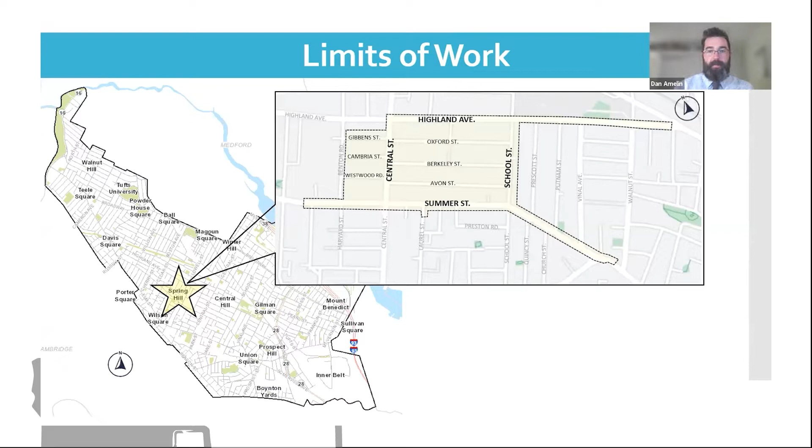So this is the Spring Hill Sewer Separation Phase 1 project. The limits are outlined here on your screen. We've got Highland Ave to the north, Summer Street to the south, School Street to the east, and let's call it Central Street to the west, although we do include Gibbons, Cambria, and Westwood within our project limits. There's a lot of different facets that go into this project and why we're doing this project.

As we get into spring, summer 2023, we transition out of upgrading all these utilities and focus on surface work. What that entails is split between green stormwater infrastructure and tree plantings, and a lot of mobility improvements. For green stormwater infrastructure, we're going to be building bioretention basins and stormwater tree trenches. In certain areas we are going to have some permeable materials, pavement, brick pavers.

And then for mobility improvements, we're going to be installing a lot of curb bump outs, replacing a lot of sidewalks, installing bike lanes, separated bike lanes. Central Street, as a matter of fact, is going to have separated cycle tracks heading north and south. We'll have speed bumps, speed humps. And I'm sure there's something else I'm missing. It's a very long list. But that's kind of the icing on the cake, right?

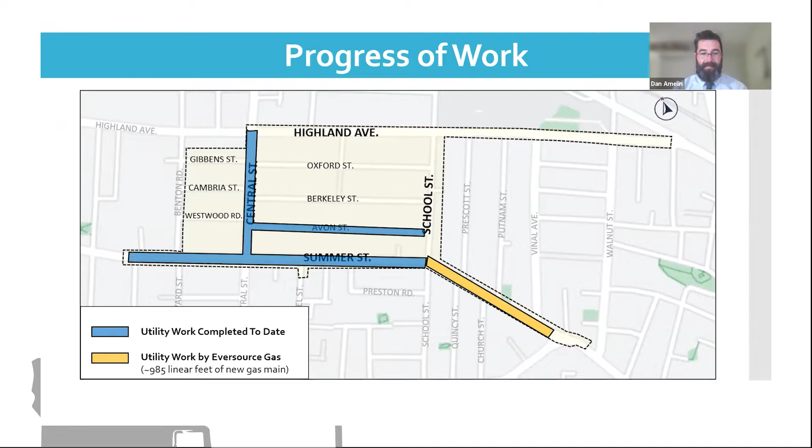So before we get into the nitty gritty of the work completed to date, first and foremost, let's talk about trees. Originally, this project had about 25 trees slated for removal. 15 have already been removed. We've got another 12 trees that will be coming down November 22nd and 23rd. So just in a couple weeks here.

For these trees, we did have a tree hearing back in February. These trees are slated for removal, the majority of which are ash trees, which unfortunately suffer from the emerald ash borer insect, which sadly kills the tree. So they are hazardous and thus slated for removal because of their poor health condition. The good news is we're planting 185 new trees. So there's a huge net positive here.

We have to wait a little bit until we get to that portion of the project, which could happen as early as late summer, early fall, about a year from now, before we start looking at tree plantings. But we just wanted to give you this quick update, knowing that the remainder of the trees that are slated to be removed will be removed here in the coming weeks. And that will most likely be it for the remainder of the project in terms of tree removals.

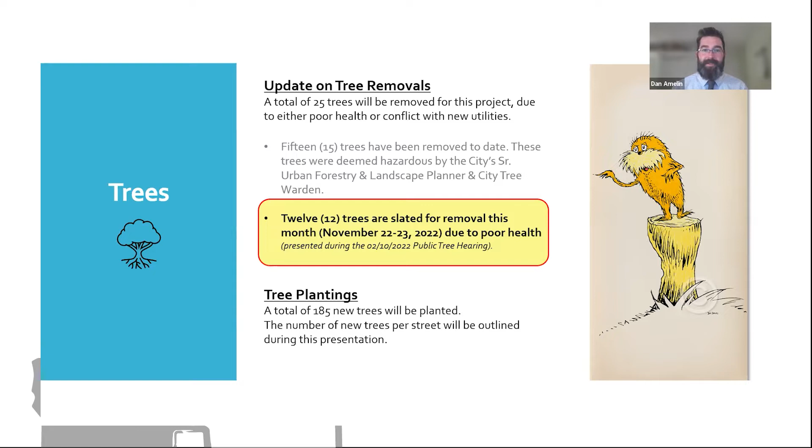So work completed to date. Let me dive into this in a second, but before I do, I will acknowledge there's a lot of words here. Plenty of our slides contain a lot of words, but we will have this presentation available on our city website, should people want to come back and refer to some of these quantities and more technical details. I don't want to bore you all to death reading each and every individual line, but we did think it was important to highlight exactly what's been done since we started this work.

So many of you have thankfully been patient with us in the construction process here, and it hasn't been in vain. So Summer Street, for example, we've got 2,500 feet of new drainage, almost 30 new manholes, a little more than a dozen catch basins.

Again, apologies, I've got a small child. I don't know if you can hear him screaming, but if you do, my apologies.

All new sewer pipe, and this next one's pretty interesting, and this applies to a lot of streets within this project. Despite some of these sewer mains and sewer systems being roughly 140 years old, engineers back in the late 1800s did a really good job of building these. Each sewer is typically made out of brick, all installed by hand. Obviously nowadays we typically use a Schedule 40 plastic sewer pipe.

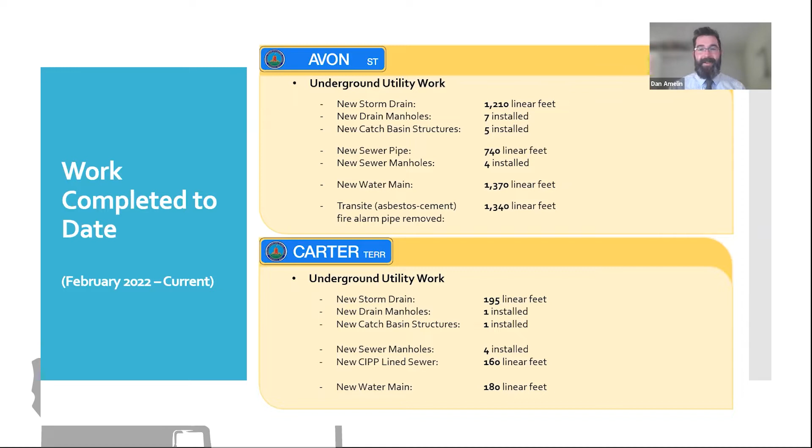But moving on, our look-ahead schedule. Jesse alluded to this during the introductions at the start of this presentation. We are going to be having another meeting next spring. The focus now is to look at what's happening between now and March, April of next year.

As Jesse mentioned, there is ample work that can be done during cold weather, during the winter. So all the streets you see in front of you, Highland Ave, Berkeley Street, Oxford Street, Cambria Street, and Westwood Road. At some point here in the next 2 months, our contractor will begin drainage work and sewer work. Those are the 2 predominant pieces of work that can be done during cold weather.

I do want to make a special note because each of these streets does have language that says they will be getting new water mains, new water services, and hydrants. We don't do that work over the winter. No. To address a question that may come up later on, many of you, especially on Summer Street, Central Street, Avon Street, have been connected to a temporary bypass main, which is essentially a temporary water conveyance while we upgrade or replace rather the water main that's in the street.

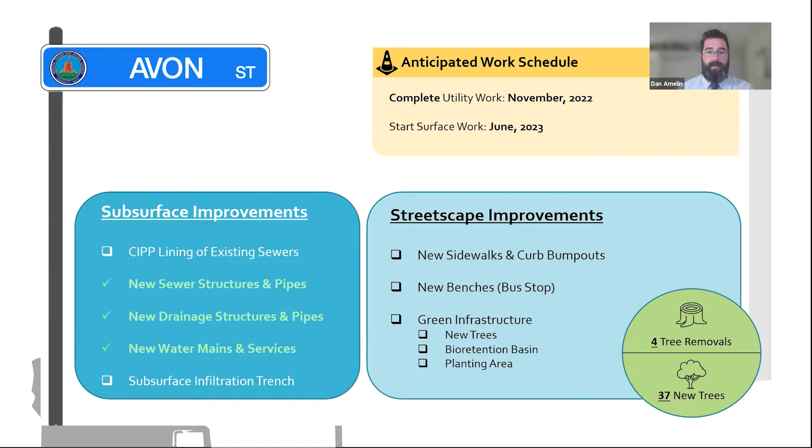So that being said, just to give you all a taste of what this type of work looks like, here's just some photos. We've got photos for a couple of streets, not every single one, but as you can tell here on Avon Street, on the left, we've got a sewer pipe installation. On the right, we've got a water main installation, excuse me. They look awfully similar, two completely different things.

And as we get through this, I think there's a slide for Central Street that I want to point out. Digging through city streets, as I mentioned earlier, you're going to come across a slew of other utilities. If you can tell in the photo on the right, kind of in the foreground, there's a pipe that crosses that trench. It's very small. But these are things that we try to anticipate and expect. We don't always know where they are. So depending on the work we're doing, the depth at which we're excavating, you may uncover other utilities that weren't known when this project got designed.

Just due to the nature of these streets, the age of these utilities, and everything that happened in the years between, that certainly predate the three of us working for the city. So it's certainly challenging work. We're certainly trying to do our best here and get this work complete with minimal disruptions and impacts to each and every one of you.

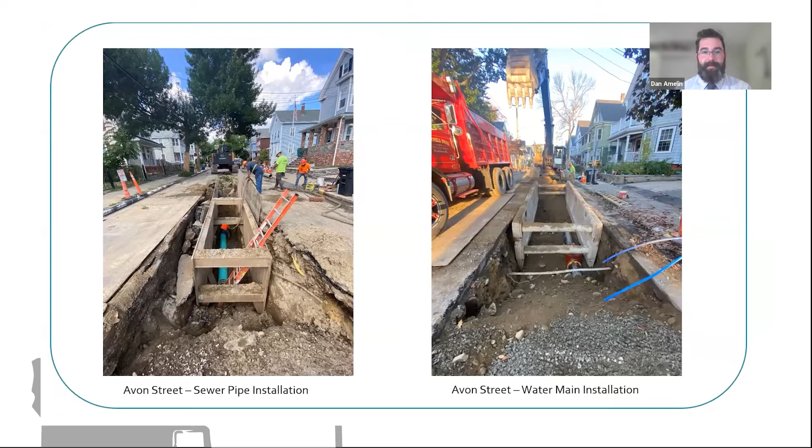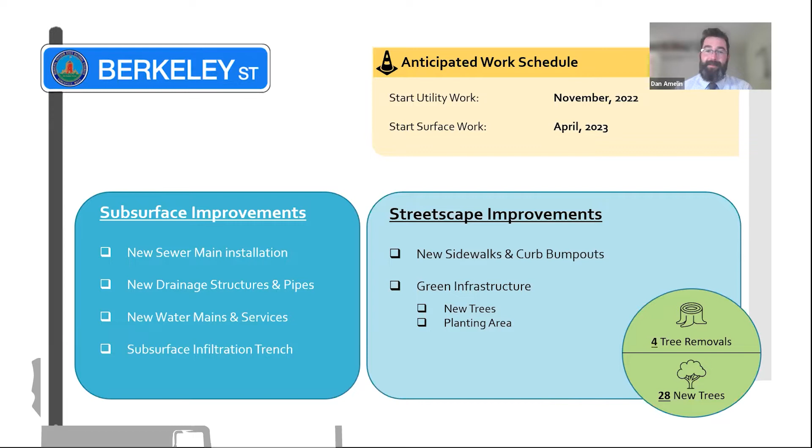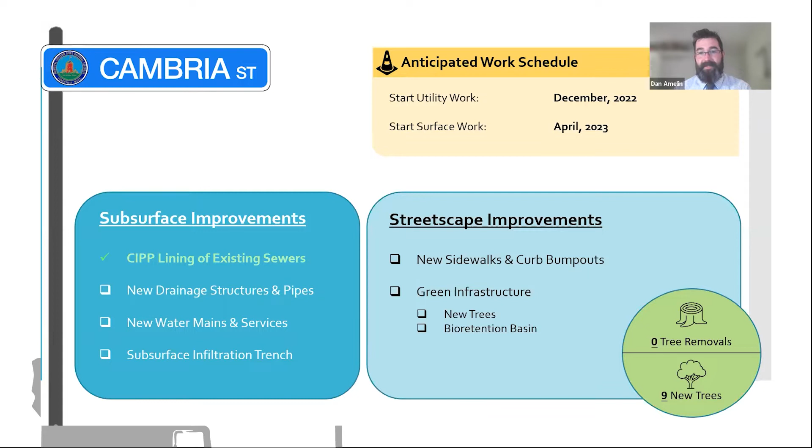Good news on Cambria Street, we've already lined that sewer. For the folks here from Cambria Street, we are expecting to start some work in December, so next month. For the folks on Carter Terrace, thank you, you've endured a lot here on your street. You've got new sewer structures, new drainage structures, new water main, new water services. We will have to come back and line the very short section of sewer on your street.

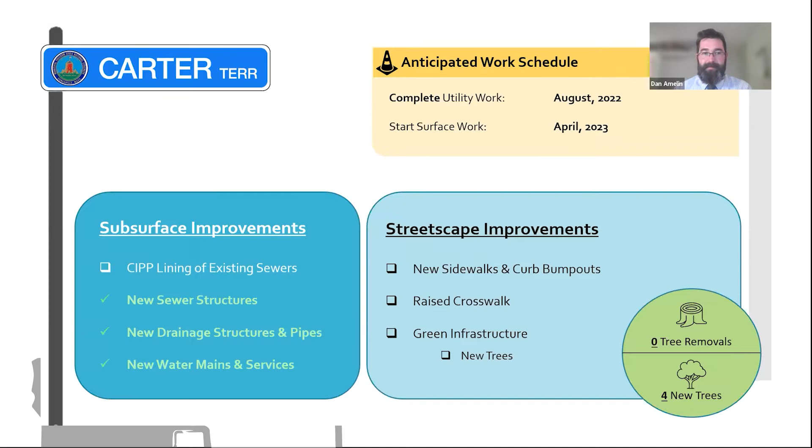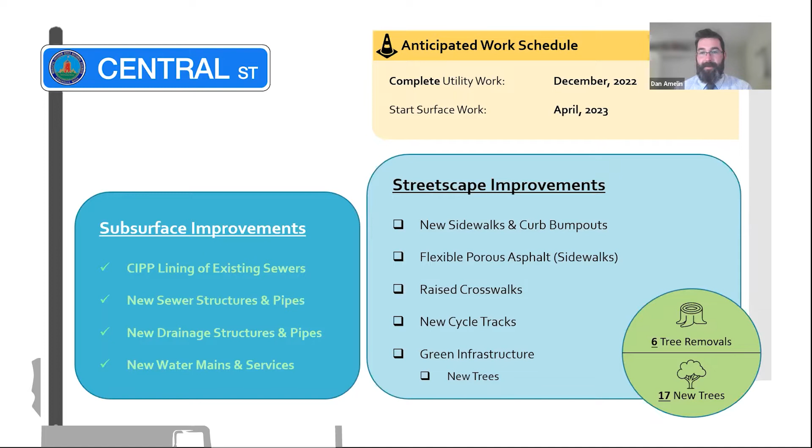Central Street, which has likely been a bear for a lot of folks using Central as their main thoroughfare to get home. We've been on Central Street here for the better part of 6+ months. We're wrapping up our work here by Thanksgiving, and we can finally reopen the roadway in two directions. Again, it's the completion of sewer, drainage, water, and sewer lining. So it's a lot of work.

And to show you what I mean, here's some photos from Central Street. On the left, we've got a drainage structure being installed down by the Summer Street intersection. Up by the Somerville Museum, you can see a new water main being installed. And one thing I want to point out, without getting too far ahead of myself, the bricks you see in the photo on the right, in front of the Somerville Museum, those are historic bricks. It's kind of cool. They've got the letter S stamped in them. We plan to save those and reuse those when we come back to construct the streetscape. They will be used as a buffer between the southbound cycle track and the roadway.

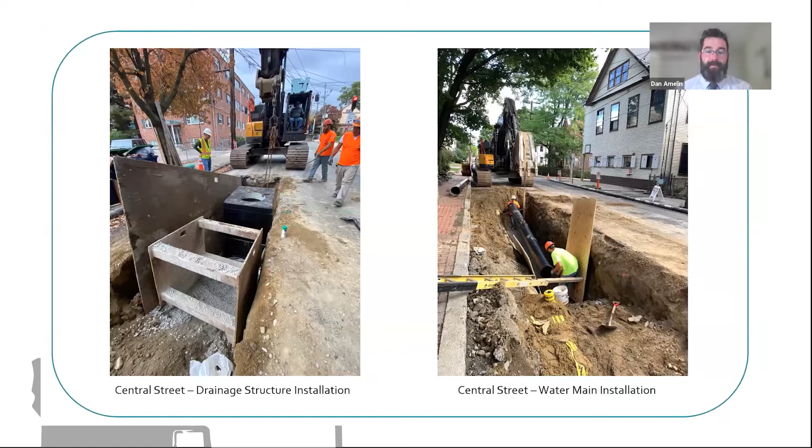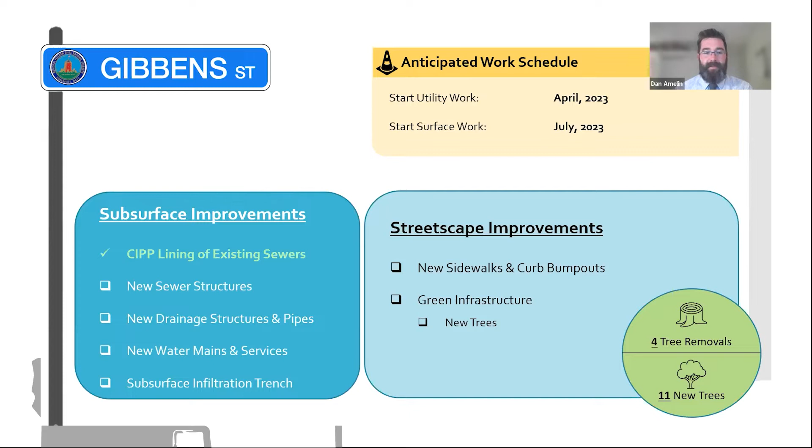And I'll stop talking now. I'll flip slowly through here. I may actually start talking here again in a second. Gibbens Street, this work probably won't happen until next spring. I know there's some ancillary work going on now, but the bulk of it will happen next year.

And Highland Ave, I spoke too soon when I said I'd stop talking. We've done a few test pits on Highland Ave. We are slated to be performing some pavement cores on Highland Ave in the next, really this week, next week. We understand that on Highland Ave, the condition of the roadway is subpar. It's a very rough road to drive on.

I'll take this time to mention, within this project, we currently don't have plans to perform any surface work. We do have a future project specifically for Highland Ave to perform all these surface improvements. Without knowing how far into the future that is, there may be opportunities here to do some restoration work as we get closer to the end of this project, given the condition of how the roadway turns out after we do our utility work.

So the one piece I do want to mention, which could happen in the next week or two, we do have utility work at the intersection of Central and Highland, on Highland between Central and School Street. We are going to have detours for this work, even though you think the roadway is pretty wide as it is. The location of the sewer is more or less in the center of the road. We will have to remove some parking, and we will have to detour westbound traffic.

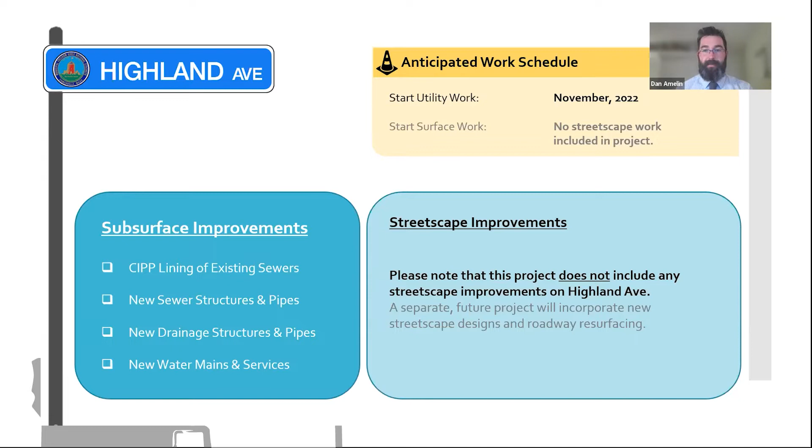So I'll walk you through what this detour is going to look like. The total duration of all this work from the intersection all the way to School Street is about 2.5 months. The first part at the intersection, it's not going to be the whole intersection at once. We more or less have to bisect the intersection into 2 halves. And the reason is we want to at least maintain one direction of traffic. It will be the eastbound lane.

Part of the decision to maintain eastbound traffic is due to the fact that Somerville Fire Department has a firehouse further west on Highland Ave, closer to Cedar Street. For the work in the intersection, the Highland Ave westbound lane coming from McGrath Highway will be detoured south onto School Street, west onto Summer Street, north onto Belmont Street, and then west again on Highland Ave to resume the route.

As I mentioned, given the location of these sewer and drain utilities, the depths at which we have to excavate and the machinery that our contractor has to use, we can only keep one lane of traffic open safely. So for the first portion of this intersection, we're going to take the northern half of Central at Highland. That's about 1.5 weeks. This could start middle to end of next week.

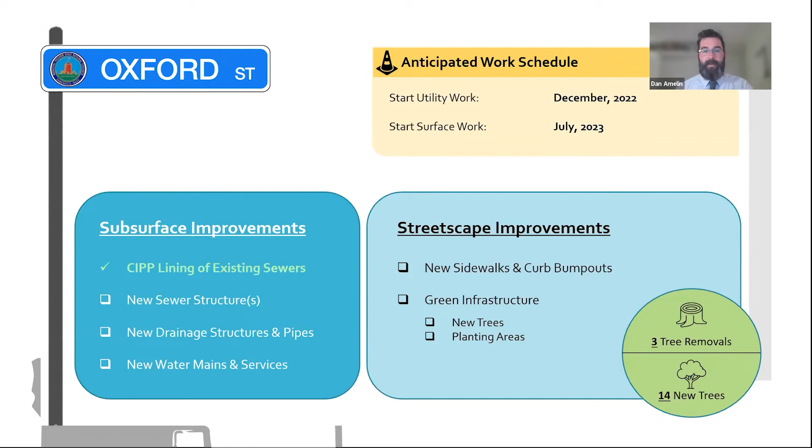So that's Highland Ave. That's upcoming here in the next week or so. We wanted to tell you here, like I said, we don't have an approval yet, but it does seem imminent. So back to streets. Oxford Street, we've lined sewers. We'll be starting next month with some more sewer work and drainage work. School Street likely won't start until next spring. There's just only so many areas we can work at once, given the amount of crews our contractor has available. So there'll be more emphasis on School Street when we meet again next April.

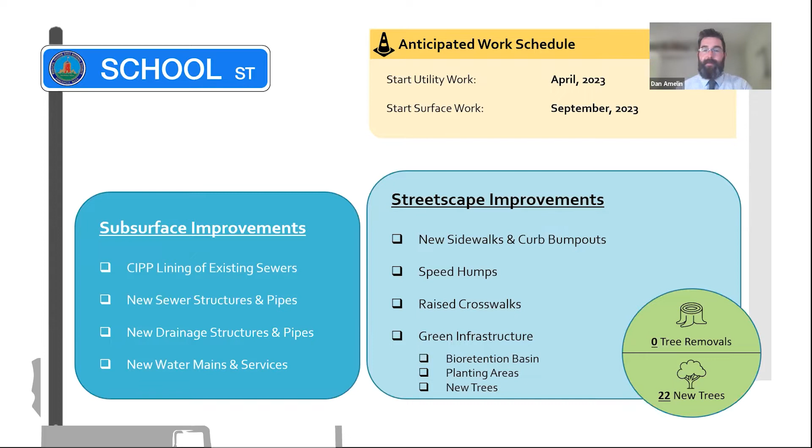And Summer Street, we have this broken up into two sections. As I mentioned earlier, Eversource Gas has been working on Summer Street between School and Bow Street. We can't work there until next year. For the section between Spring Street and School Street, however, this is more or less what we just completed. The street's been picked up. We've heard from a lot of you and have seen with our own eyes some of the, let's call it a mess, let's call it what it is. And we asked our contractor, before you start work on other streets, you need to clean up Summer Street.

Certainly there's residents who have had to stare at drainage structures in front of their house. There's residents who have had to deal with detour signs being placed on their fence or on their property. These are things we don't condone. We don't take them lightly. Jesse, Nick, and myself are not out there every day. We do have Stantec available on site, but they can't be everywhere at once either. So we encourage you, if there's certain things going on in the street, cleanliness issues, dust issues, which we've just heard about in the past week, which I'm happy to say are going to be addressed in the next day or two, we want to hear about it.

We acknowledge this work is cumbersome, it's impactful. We don't want your concerns to fall on deaf ears. We want to hear so that we can make adjustments. We can work with our contractor, we can work with our consultant Stantec to improve as much as we can for each and every one of you to have some sense of normalcy here while we do all this heavy utility work. And we'll talk more about how you can reach out to us going forward in this presentation.

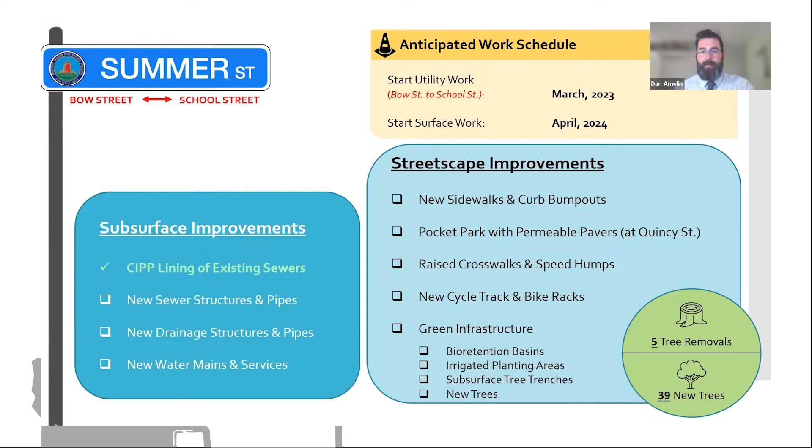What I alluded to earlier, Summer Street between Bow and School. We likely won't start work there until about March next year, so we can revisit that in the spring. And Westwood Road, last but not least. Again, the most recent schedule available to us shows this work predominantly starting next spring.

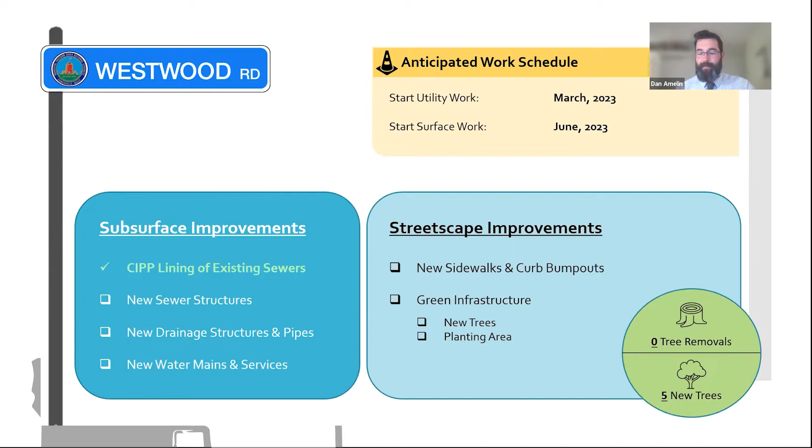So I hope I've answered some questions already, but for those who are curious, here are some of the questions that we've received to date from residents, from constituents, from councilors. We certainly tried to capture them as generally as we could. I don't think we could get every specific question listed on here for this evening, but we wanted to go over what we see from you all and provide some of the answers that we've provided to your neighbors.

Broken down into three categories. First is water quality. A lot of questions we received early back in the spring and early summer is, what is this pipe? What is this blue hose that's now connected to my house? As I mentioned, that's our temporary water bypass pipe that provides you clean drinking water. You are connected because they de-energize. They basically flush out the existing main so they can either remove sections, remove it in full, and replace it with brand new pipe.

The process to connect each individual building, home to water bypass, typically what our contractor will do is connect that plastic rigid blue hose to a faucet, a spigot, like a hose spigot, backfeed your house while they take the existing main out of service. More often than not, what that means is they bypass the water meter on your house. One question that we receive probably the most frequently, honestly, is how does this affect your water bill?

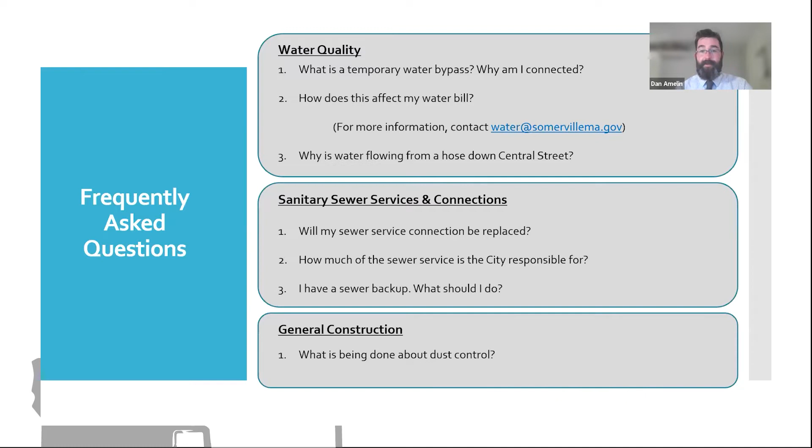But really, I would say the best way to get in touch is just call me. My phone is always on. I will get back to you. I pride myself in accountability to this project. So if anything comes up, I can be your first call. Also, if you call 311, they'll connect you with me if that's easier as well. But I'd write that number down.

Now is the part of our presentation where we're going to take questions, and something happened that I found a little unexpected. We have 31 questions in the chat tonight, Dan. So I think I'm just going to read one, and then we can discuss it. And then after that, we'll start actually unmuting folks if they want to speak to us. But we should address the 31 that came in first. So, Dan, you want to click the slide button?

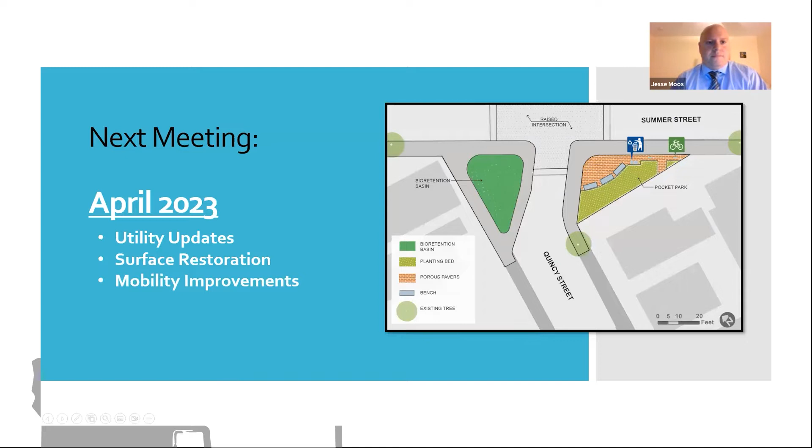All right. Question number 1. Construction activity is occurring on our street, but we are not getting notices about the insurance documentation review, and the company said they are not on our street yet. What happens if the current work damages our house?

They reached out by doing certified letters at first, then just kind of basic knocks on the door. It is possible that you didn't receive the letter, you were not home and they knocked on the door. We want to make sure that this is happening and they're documenting the current conditions, and then if anything was to happen during construction, we can review photos and then discuss if a claim should be made.

Let me just add to that, Jesse, real quick. Sure. For those of you who are joining us who are renting, Jesse mentioned we send out pre-construction inspection letters. Basically, a letter saying, would you like to have your home inspected prior to the start of this work on your street? Should something happen, we have a record of what it was before.

For the renters that are out there, these letters are addressed to the building owner. If you have concerns that your building has not been inspected, please contact the owner of your apartment, your building, and follow up with them to see if they've received a letter.

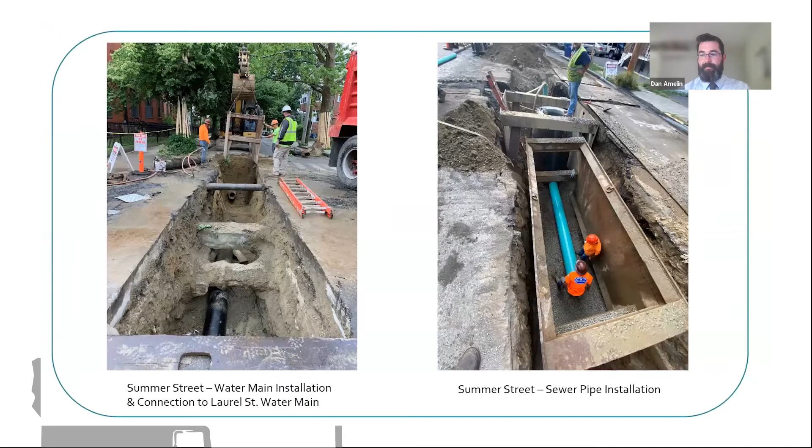No, not a problem. When you're talking about detours for traffic, does that mean all traffic, cars, bikes, people in wheelchairs and pedestrians? Or to ask a different way, are there any different plans for people who need wheelchair access or who are on bikes? So bikes will be part of the detour. As Dan was just saying, this will be open for buses and emergency vehicles, but we do expect bikes to be able to use the same detour as others.

I mean, I think bikes could probably go down Oxford Street and not be such an issue. I don't know if Anton would be happy with that as they go by his house, but he's a biker.

For wheelchair access, I think that's something we have to look at in the field. Some of the work is near where there are accessible spots, and we want to make sure that we are giving an alternative for people who need those spots, especially since there are businesses in that area. Like I mentioned, temporary crosswalks will be installed while some of this work is going on. Say we have to dig into the sidewalk to replace a water service or sewer service, our crosswalks will need to be ADA accessible, and we will ensure that happens. Yep.

Another Highland Ave question, though we kind of talked about this when you had the original slide up. Highland Ave is really scary and dangerous to bike on due to lack of separated bike lanes and poor road conditions. Any update on making it safer? This is from Chris Ostel. Chris, our project doesn't include that. When our contractor is done doing the work here, they will do a trench restoration of this portion of Highland. But a future project will deal with Highland Ave, doing paving and bike improvements, just not this one. And I don't have a timeline for that.

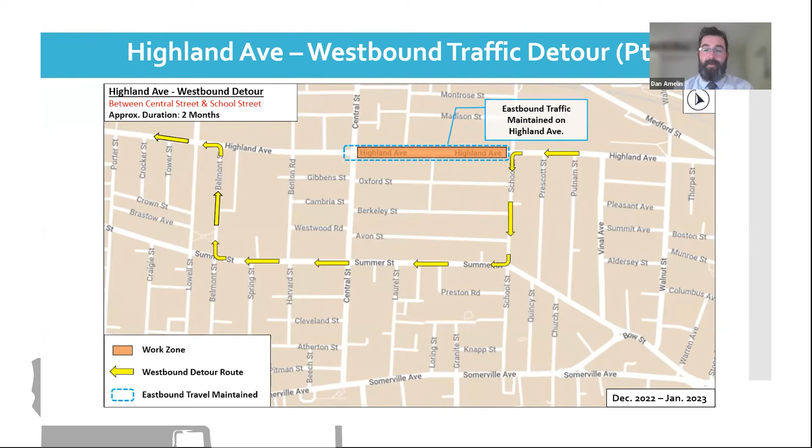Every granular piece of material that gets excavated and can't be reused as backfill goes through an extensive classification system. We have certain items within the contract, depending on the level of contamination, and the overwhelming majority of the soil that we've removed from site from a lot of these trenches has been clean natural fill. I don't know off the top of my head what the lead levels are. I'm certainly happy to look into that, but I do not believe it should pose a health hazard.

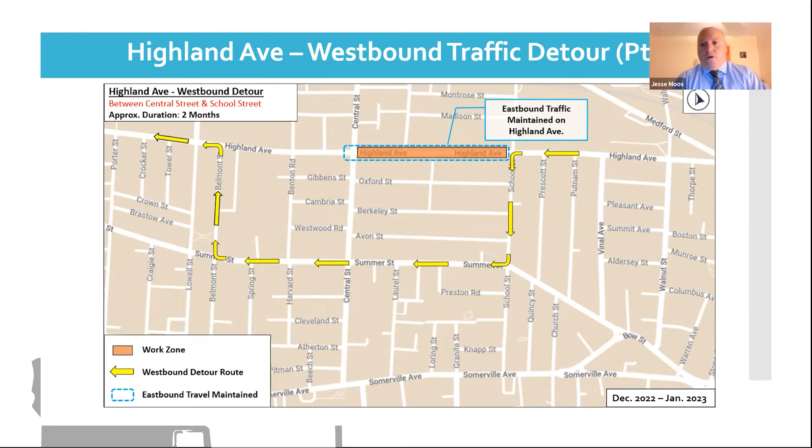Thank you, Dan. John Councilman asks, with work beginning on Gibbons, Cambria, and Westwood, is there a plan to alleviate issues with the loss of parking? So, John, we stagger the work we're doing. We try not to have them do multiple streets at one time. So before they jumped Central, Summer Street was pretty much finished, except for maybe two catch basins on the other end of the street.

As they're doing Berkeley, Cambria, you can park on Gibbons and Westwood. As they finish Berkeley, they will jump to the next street. Parking will then be available on Berkeley. So it is staggered in how we plan it, because we obviously don't want to remove all the parking at the same time for the neighborhood.

Jesse, mind if I interject really quickly? Sure. I think this was another question that came up maybe a month ago, about the temporary no parking signs that our contractor's putting up. We took note of this too, that they had an awful lot of these cones with signs that said no parking for work that wasn't happening on the street for that day, that week, two weeks even. We understand that certainly takes away options from you folks here in the neighborhood.

And there are times the schedule changes where they plan to go on a certain street and have posted no parking signs for that day or that week. Something comes up or they hit a delay with an unknown utility and they can't get there. We ask our contractor to either go remove those signs or update the dates. Please be cognizant that they do include dates at the bottom of those signs.